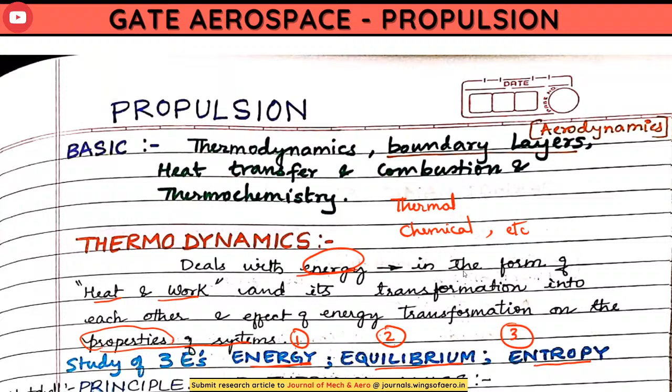Now we have four principles, as we have discussed. The first and foremost is the Zeroth law. Then we have the first law, second law, and third law. Each and every law plays a very key role.

When we are talking about the Zeroth law, we will be talking about thermal equilibrium - how the temperature gets balanced from one body to another body. So mostly we're dealing with temperature.

Now when we look at the first law, we'll be looking at internal energy, enthalpy properties, and how the energy is getting conserved. At the same time, when a body undergoes some kind of heat addition, how much work done will be undertaken by the particular process.

When we talk about internal energy, we are seeing the impact of intermolecular factors - we are looking more into the microscopic level. So we will see what microscopic level means also. The first law deals with internal energy. In some textbooks, internal energy is denoted by E or U, so you can follow any one of the conventions.

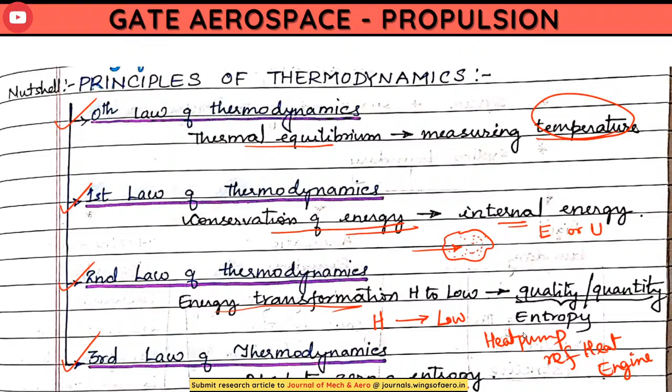We will also discuss thermodynamics. There are two types: classic thermodynamics and statistical thermodynamics. One deals with a macroscopic approach, another with a microscopic approach. Mostly here we will look at the microscopic approach, meaning more detail about intermolecular structures, how they affect and lead to heat transfer, and so on.

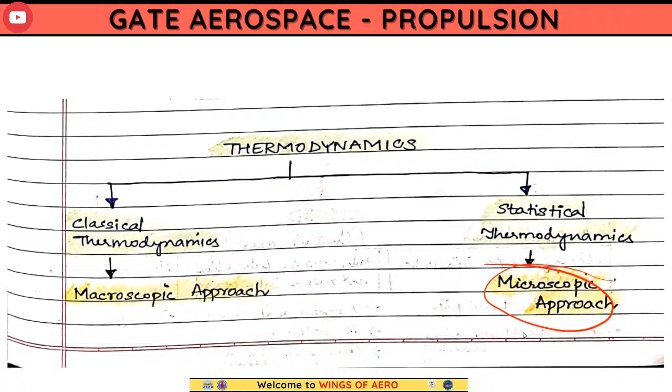Now, when we talk about thermodynamics, we will understand the background of thermodynamics, starting with thermodynamic systems. Just take any random surface, as you can see here.

When we have a particular subject or system, or a particular area, we can call it a control volume. Suppose we have some particular volume you are going to analyze over this region. You create some kind of boundary, and that control volume becomes your system. The outlines of that system become your boundary, or system boundary.

It can be either real or imaginary. Suppose in a big mass you want to find a small amount of mass from that big mass, then the boundary becomes an imaginary boundary. If you consider the entire mass that exists, that becomes real. For example, in a container you have water.

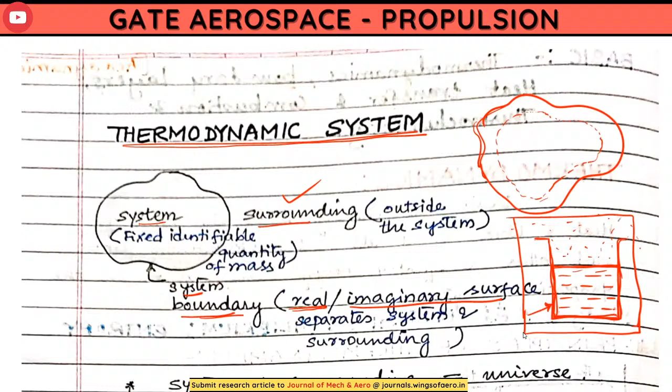Now we have many types of system boundaries. It can be of different types: rigid, adiabatic, and diathermal. So what does rigid mean? Here you can expect a question like 'match the following,' where they ask you to match the kind of boundary with its properties, so you should understand what these bodies mean.

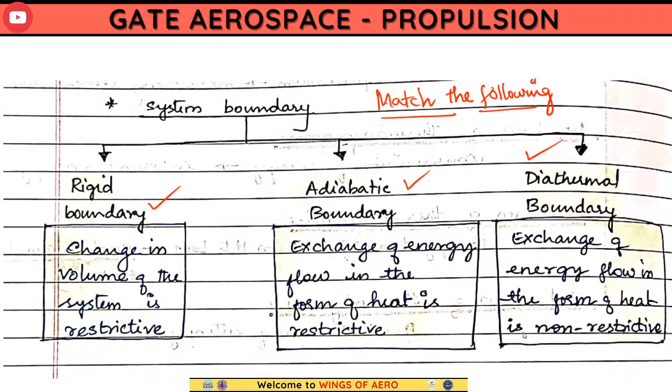Rigid body, in the sense—rigid means when a change in volume in the system is restricted. You have this body, this container, this water, and your control volume is not changing. That means the boundary, due to some external atmospheric surrounding, is not affected. It is fixed, the volume is fixed. That's when we call it rigid—the boundary is rigid, not flexible, it is fixed.

Adiabatic means the exchange of energy flow in the form of heat is restricted. When we add any heat, the system does not get heated up; it is not affecting the system. As you know, adiabatic means heat is considered zero. So when external heat is given in the surrounding, it does not affect the system—such a boundary is called an adiabatic boundary. Diathermal boundary is the opposite, which allows heat to pass through the boundary.

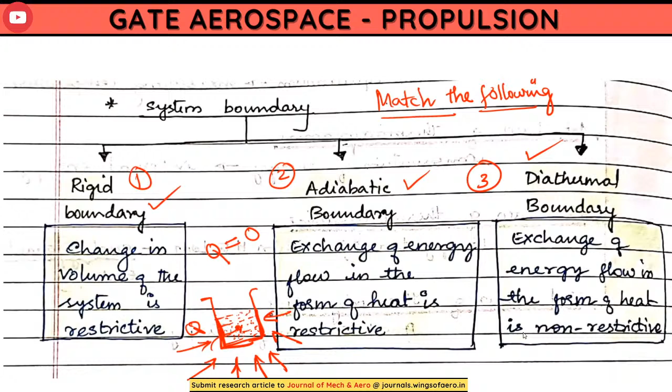So there are three types: rigid, which does not allow the volume to change; adiabatic, which does not allow heat to transfer; and diathermal boundary, which allows heat to transfer freely into the system. Now we will look into the three types of systems.

In this question, you can expect a match-the-following type, or maybe they will give you a statement and ask you to predict what the following systems are. So it is very important to understand the types of systems. There are three types of systems.

This type of system depends on how energy and mass are transferred. Energy means heat, mass means whether the mass or volume is changing or not. That is what the type of system depends on. We have three types: open type, closed type, and isolated type.

When we have the open type, that means it is free to interact in terms of energy and mass. That means mass can freely move, and if any body is there, energy can also enter and move, and also the mass. There is a movement of mass. For example, boiling of water.

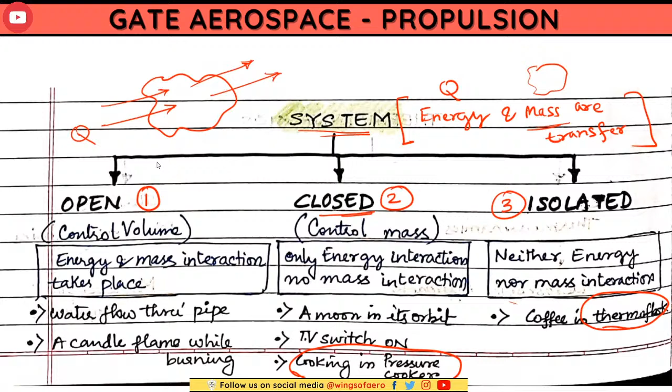Okay, now talking about thermodynamic properties. As I've said, we have to remember about the properties of thermodynamics. So whatever energy transform or whatever things happen, it can be transformed in two different forms: either it depends on mass or is independent of mass. That means thermodynamic property means either it has to be dependent on mass or independent of mass.

When it is dependent on mass, we call it extensive, and when it is independent, we call it intensive. I hope I have asked you a question on this before, since every time in the GATE exam they ask one question from here, so you have to remember the examples.

Whenever there is something specific, like specific volume or specific energy, it mostly comes under intensive. And remember, pressure, temperature, and density are all independent of mass. But volume is mass dependent, as are internal energy, enthalpy, entropy, energy, and momentum—all these are dependent on mass. Please remember these examples, they are very important.

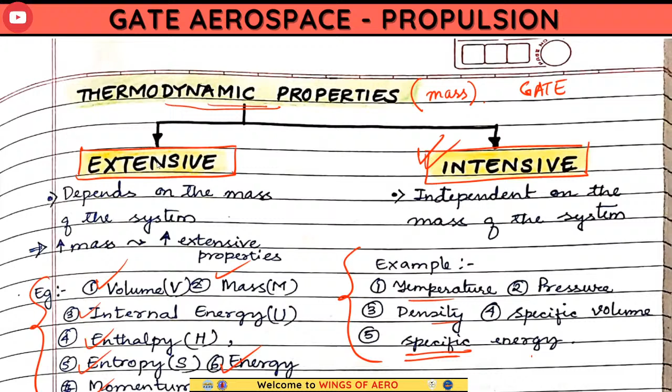Now moving to the process. It is very important to understand the process. Based on the process, they ask whether it is a path function or a point function. So before that, you should know what is the difference between path and point.

Path means process—we are talking about the thermodynamic process. That means when heat is added into the system, it might undertake some work. It can be work done by the process or on the process—it can be anything. So what type of process is it? Suppose it is changing from one state to another state. Let's consider it is moving from state 1 to state 2.

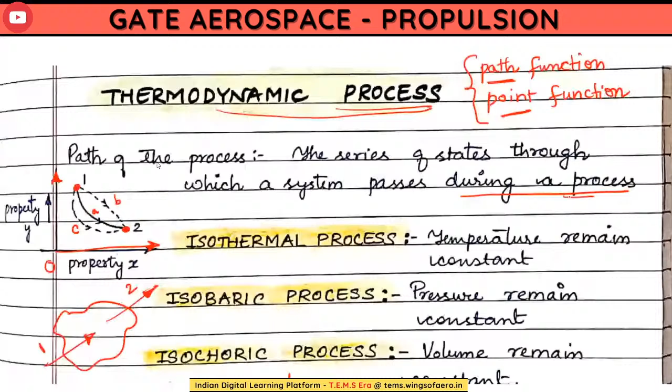We have the isothermal process—isothermal, that means same; iso means same, thermal means temperature, so when we have the same temperature. Isobaric—iso means same, baric relates to pressure, since pressure unit is bar—so isobaric means when the pressure is constant. Isochoric is when the volume is same, or volume is constant.

That means if you have the process 1 to 2, in an isochoric process V1 will be equal to V2. In an isobaric process, P1 will be equal to P2, and in an isothermal process, T1 will be equal to T2.

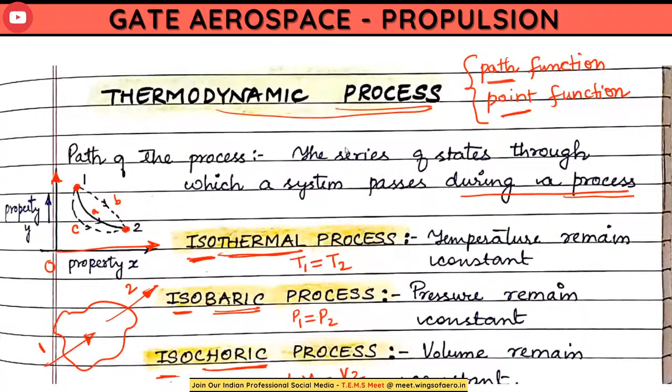Now comes the cycle. After the process, how do these processes move? As I've shown here, we have some property on the X-axis and some property on the Y-axis. Now, if I say the process is moving from 1 to 2...

Let's consider this axis as volume and this as pressure—volume, not velocity—because it deals with volume, pressure, and temperature.

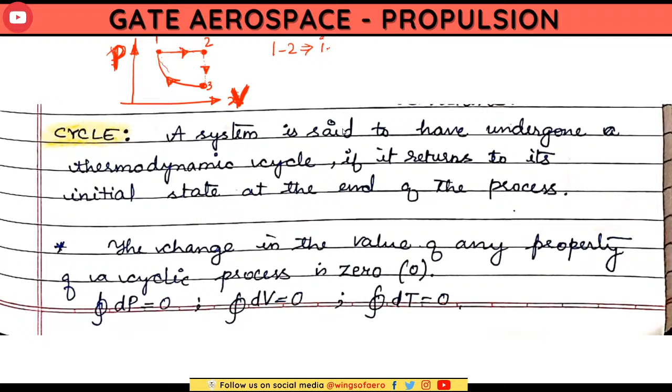Now in this first segment, 1 to 2, what process is that? We have the isobaric process, because P1 equals P2. If I put a dotted line, P1 and P2 are both the same. But that doesn't mean V1 is equal to V2.

Now the second is 2 to 3. What is 2 to 3? We have the same volume—that means it's an isochoric process, so V2 equals V3. That doesn't mean P2 is equal to P3.

Then 3 to 1—can you tell me what is 3 to 1?

It's isothermal now. It's an isothermal process. That means here the temperature T3 has to be same with T1. It doesn't mean that V1 equals V3 and P1 equals P3.

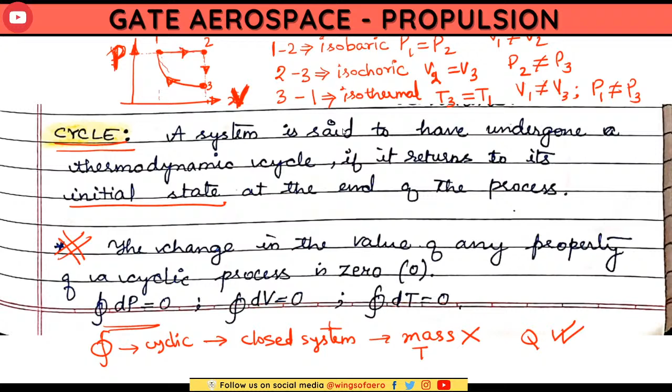Now let's come to the zeroth law. Before that, I will highlight a few more things about specific gases. So before you start your thermodynamics, you must know a few formulas.

Cp by Cv is n plus 2 by n. Do you know these formulas? Please remember this formula. These are the specific heats of gases. The value of Cp for air is 1.005 kilojoules per kg per Kelvin, and Cv is 0.718. Then gamma equals 1.4. Gamma is the adiabatic heat constant, or you can also call it the adiabatic index.

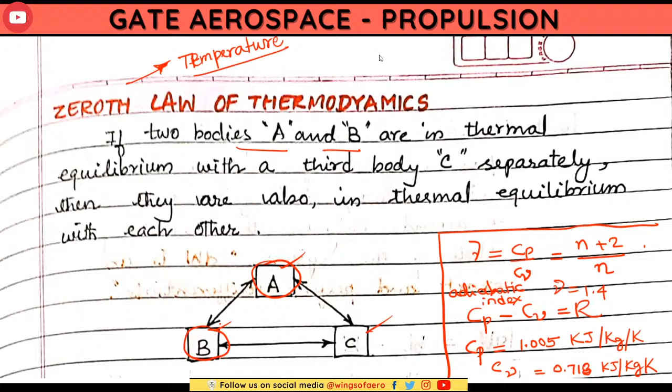Now what kind of temperature? They have taken three bodies, A, B, and C. When body A and body B are in thermal contact with each other, and if there is another third body which is also connected with one of these bodies, then the temperature of A, B, and C will be the same. When A and B are in thermal contact with each other, and another body comes into contact with any one of them—it can be with A or with B—then all these three bodies will be brought into thermal equilibrium. They will be having the same temperature.

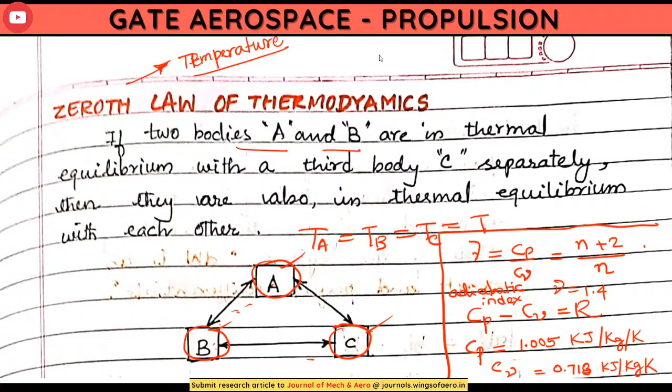Got it? Alright, now we will move to the core and very important topic of heat and work.

So what is heat? The energy transfer across the boundary of the system because of the temperature difference between the system and the surroundings. So if there is a container, and I'm keeping chilled water in that container, and outside the temperature is about 34 degrees Celsius, and here we have around 24, let's consider this chilled water to be around 10.

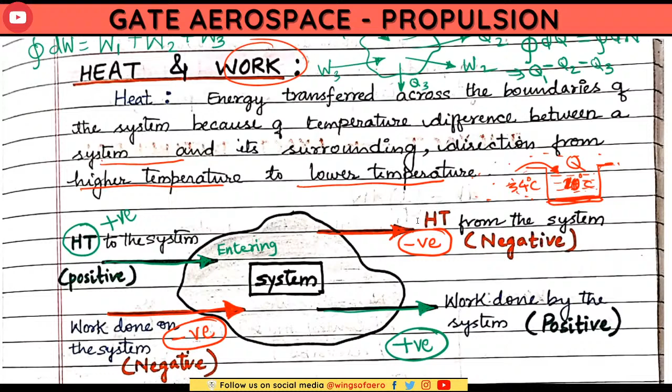So it moves from the initial state, that is 1, to the final state, that is 2. Initial state is 1 and the final state is 2.

Now it can possibly move from one state to another state in different ways. Which path can it take? It can follow process A, process B, process C, and many more additional processes are quite possible. Even this kind of process is possible.

Now in the path function, how this path is defined depends on which process it has followed. Based on the process, the path gets decided. As I mentioned earlier, it is not important what is the initial state and the final state. It only depends on which process, whether it is isothermal, polytropic, adiabatic, isochoric, or isobaric. It depends only on the process.

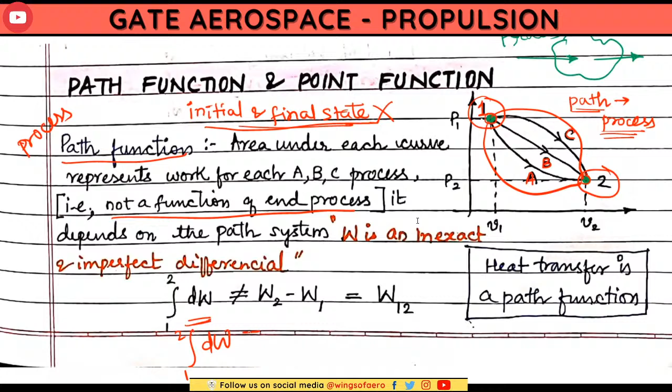So such a process, suppose work is done within 1 to 2. We can write how to find the work done: change in work done, integral 1 to 2, moving from the initial path 1 to 2. So we can write work done as 1 to 2. We cannot write W2 minus W1. We can't write it.

This means we can write only when we define the initial and final step, irrespective of the process, focusing only on the initial step and final step, not bothering with the path or process. Such a parameter is called a point function, dependent on the points, that is the initial point and the final point. Such functions are dependent on the point. For example, enthalpy, internal energy, which depend on point function.

Path function, if I say, relates to the amount of work transfer and amount of heat transfer. Work transfer and heat transfer define a path function. But apart from that, enthalpy and internal energy define point functions.

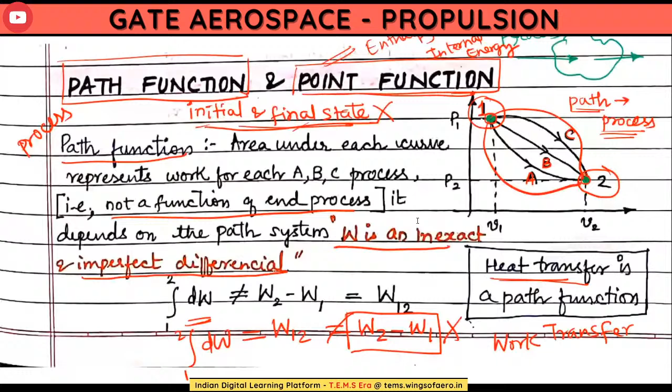So this is another important thing: W, that is work done, is an inexact differential. That means we cannot differentiate this in the path function. But the opposite thing happens in the point function. As I've said, here we can differentiate. The work done is exact and perfectly differentiable; we can differentiate the state, from which point it moved to which point.

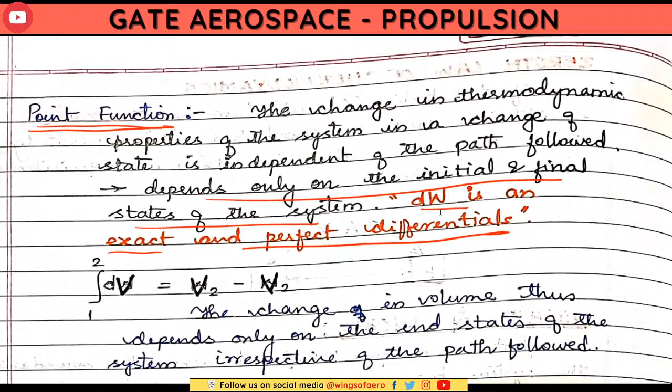Did you get it? Now we will move to the next topic, which is work done. There was a problem.

Solve it. Now let me explain what is the first law of thermodynamics, then we will move to the work done phenomenon. The first law of thermodynamics says the energy can neither be created nor be destroyed, right?

So this is only satisfied when it is in the cyclic process or the closed system. Either it is a closed system or a cyclic process. Cyclic process means again both are the same. So when I'm talking about cyclic process, that means heat will be transferring, but mass transfer can't take place.

Keep that in mind. Now remember this problem, remember this formula. I hope we've already discussed this formula, right? These are the closed integral, meaning you can also write it like this formula. All are correct.

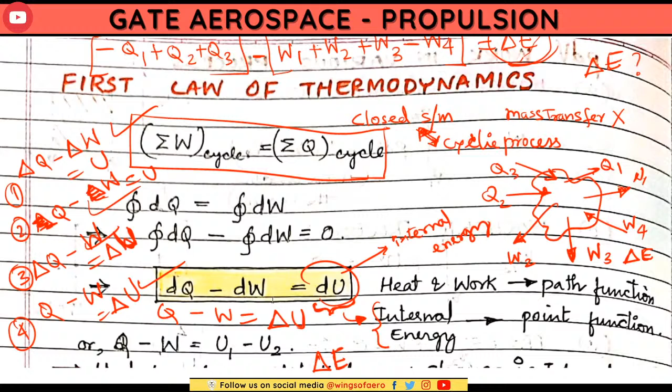Now, when we plot a graph between P versus V, where V is the volume and P is the pressure, the pressure is constant as it moves from one point to another, initial point is 1, point is 2.

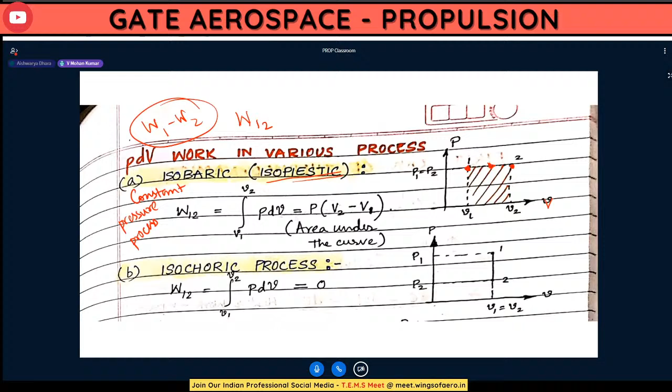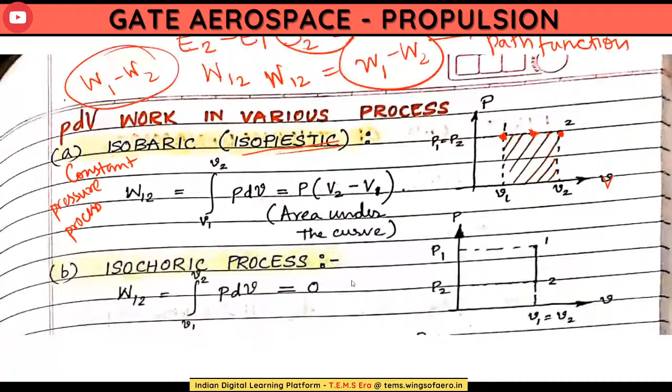So here the work done we can write as W1 2. We cannot write W1 minus W2. Why? Because it's a path function, ma'am. Very good, it is a path function. We cannot write W1 minus W2, but if there is internal energy, we can write like this, or if there is entropy. Entropy is also a point function, so in that case we can write this way. Please note that entropy is also a point function, keep that in mind.

So you can expect such kind of questions. Please all of you note down the point, entropy is also a point function. So now coming here, this is the formula, W equals integral P dV. Here we will use the change in volume. Pressure is an intensive property, and volume is an extensive property which will be changing, and which will help create a reversible process, or come back to the original state. Keep that in mind in case of non-flow work.

This is the formula, and if we are doing flow work, the formula gets changed. That time V becomes constant and P changes. In flow work, since that is a control volume, that means the volume is fixed, that's why it is also known as control volume. The volume is fixed, and that time there will be change in an intensive property. So you can also expect this question. Please keep this as a key point.

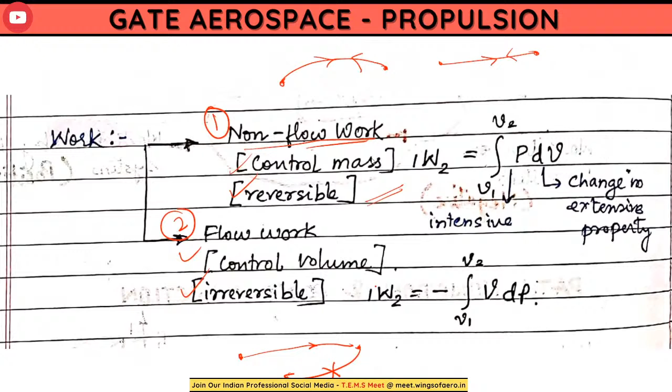Yes, you can see I have noted the formula over here. This is also an important key point. Here this is an extensive property which is fixed since it is a control volume process, and here there will be a change in...

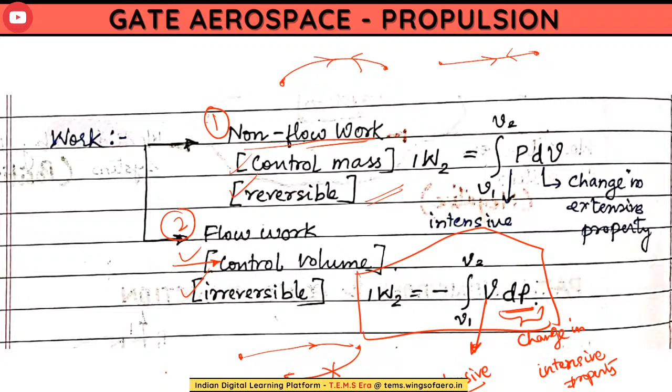So let's come back to here. Now I'm not going much deep with the derivations. What you have to do is remember the formula. Remembering the formula is the priority thing. This is not a big sort of formula, so you can remember it, right?

So whenever there is an isobaric process, remember this is the formula for non-flow work, or it is a reversible process. On that time, what is the formula for isobaric? P is constant, then the volume is changing from one state to another state. Just give me a moment. Alright.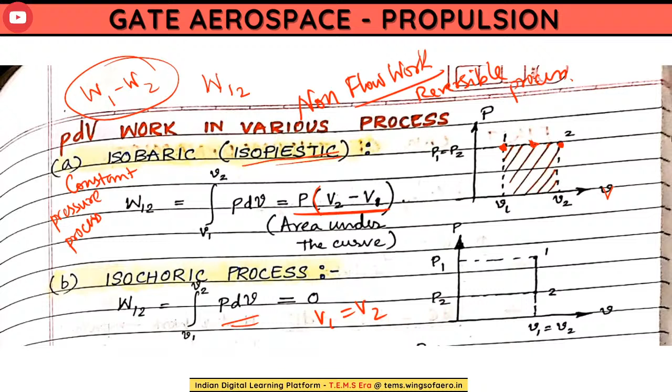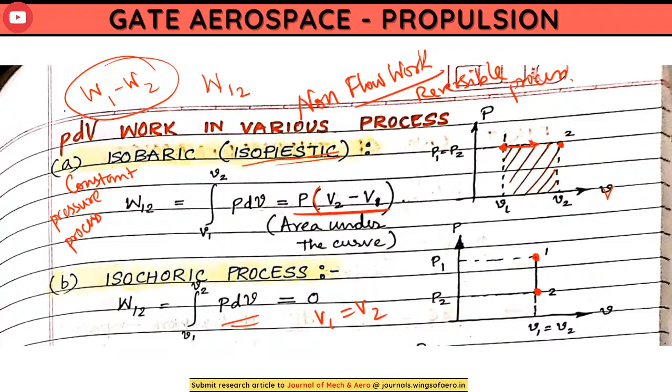So moving to the next, it is isochoric, meaning where the volume is constant. So change in volume, if V1 is equal to V2, then obviously V1 minus V2, when you substitute, it will become 0. And simultaneously remember the graph - always remember the graph. So for constant pressure, there is a horizontal line. For constant volume, it is a vertical line when plotted between P and V.

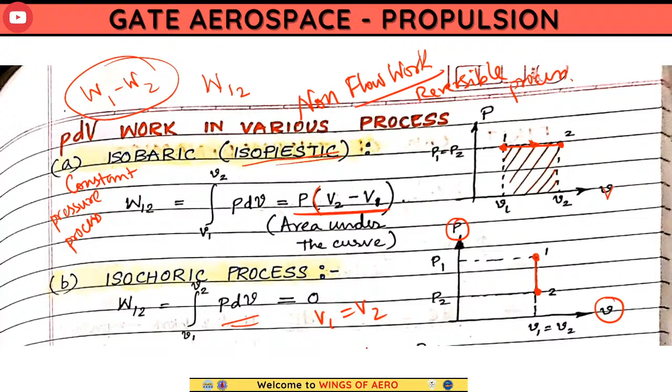Third one, we have the isothermal process. For the isothermal process, we have PV equals to C. When you solve that, you get this value.

As of yesterday, when we were solving the problem, some of you tried to find V2 by V1, then finally when I was equating P1 V1 equals to P2 V2, the values given were not equating. It was not even equating, so I think there is some error with those values, wherever they were given.

So in this kind of case, I hope this doesn't happen during the exam, so do not get panic. Just try to figure out whether P1 V1 equals to P2 V2. There are some questions in GATE where there are errors or missing values, so they used to give bonus marks for that particular question. That is not a big deal, they provide bonus marks in that case.

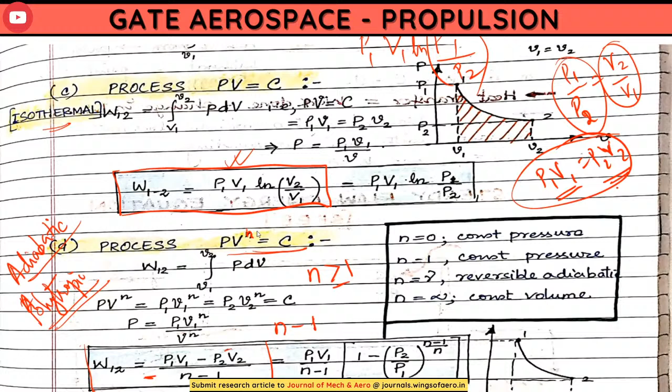So I hope you remember the formulas. Let's solve one problem.

Now this is the same thing - please ensure there is some typo error. It will be: temperature when N equals to 0, that will be constant pressure. N equals to 1 is constant temperature. When N equals to the adiabatic index, we have the reversible adiabatic process. When N is infinite, we have constant volume.

Sometimes they might give you some kind of process and ask you to find out the work done. Another way to find the work done is to find the area of the process - finding the area of the process will give you the work done.

Based on these four different processes, we can say that the work done of an isobaric process will be greater than isothermal, greater than adiabatic process, greater than... remember, I already asked this question. So again it can be asked in ascending or descending order.

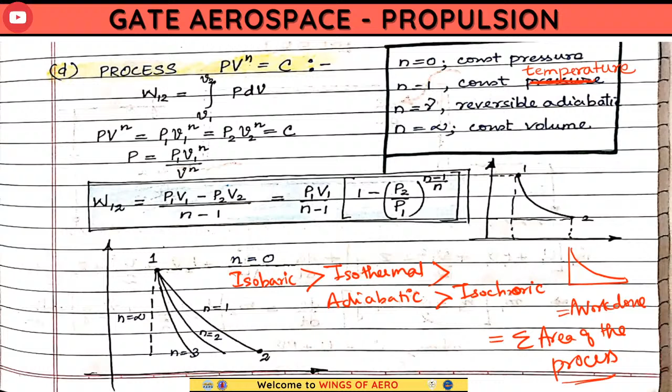Now let's move to the first problem. What have they asked? A mass M, 1.5 kg of air, is compressed in a quasi-static process from - they have not mentioned what, so I have to see the unit. That means compressed what? That means pressure, from P1, 0.1 megapascal, to P2, 0.7 megapascal, for which PV equals to constant.

Now what does that mean? PV equals to constant - which process is that? When you have PV equals to constant... this is a question from isothermal.

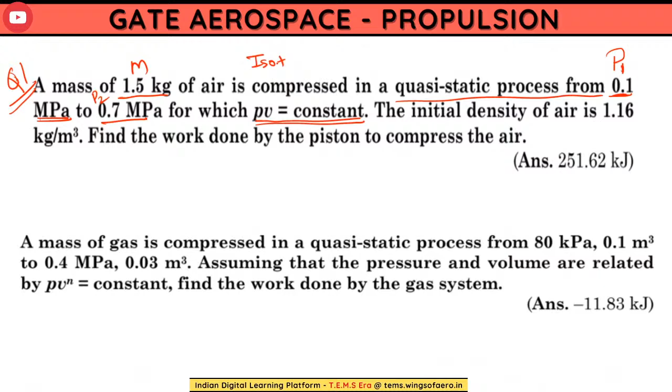Hello, ma'am. Hello, Abhijit. Bro, what happened? Not there, don't know, bro. What happened? She's coming.

I think I have been disconnected because of internet issues. How long have I proceeded? Can you see the PPT again? It's getting loaded now, loading. Okay.

Once you can see, let me know. Yeah ma'am, you are audible, but the screen is not visible, ma'am. Still not getting visible, loaded now. Okay, it's getting loaded. Okay, what I'll do is I will rejoin the session. Okay, I will cancel and rejoin the session.

You're audible, ma'am. But still something shows that it is sharing.

For that problem, I got the answer in negative, ma'am. You're getting negative? I've given the answer in that, right? Yes ma'am, magnitude is matching, ma'am, but not the sign, ma'am. Sign is getting inversed.

Negative? How? How are you getting the negative sign? No ma'am, positive sign only I am getting. There is some issue happening.

It is showing that I'm sharing some kind of presentation, it's already showing something like that. So what I'm doing is, let me end the session. Okay, let all of you rejoin it. Okay, let me try in that way. Is it okay? Okay, ending, ma'am. Yes, right ma'am, we will rejoin. We'll rejoin, I'm ending the session and let me rejoin it again.

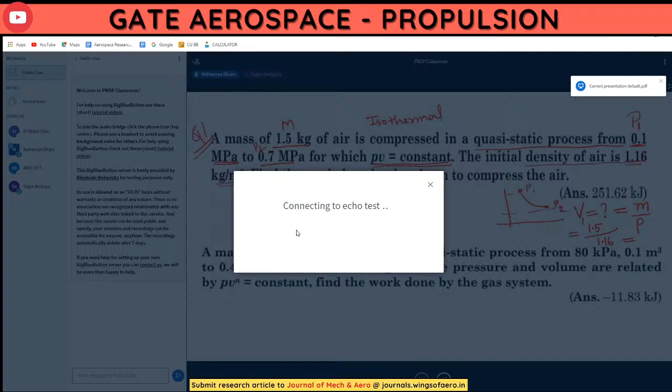Now it is visible to all of you. Yes, ma'am, it is visible. All right, so see, I have written here, I have completed till here.

V1 you have to find by mass by, you have to use mass by density, because here they have given the mass and density. Then after that, whatever value you get, you need to substitute over here. P1 is known to you, P2 is known, it is 0.7, this is 0.1, 0.7, 0.1. Alright, so after that you will know what is the work done.

Alright, so I hope you are getting the same answer. That's what ma'am, I'm getting the same answer, ma'am, but with the minus sign I'm getting, mom. I don't know why, how? Okay, because 0.1 by 0.7 will give 0.1428, and then the ln of the answer is going to be minus 1.945. There comes the minus sign, ma'am.

Okay, what value do you have? There is a 0.1 into 1.29, you have something got like that. 1.293, ma'am. Let me try, 0.1428, ma'am. That ln of. You can try.